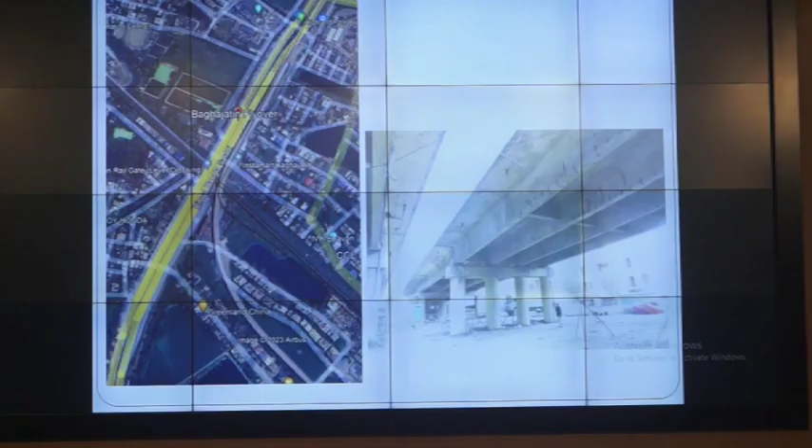See here, in many of the flyovers in Calcutta, you can see strip seal expansion joints. Please note down strip, S-T-R-I-P, strip seal expansion joints, wherein you don't get that railway bogie movement at all. It moves very perfectly, and no lifting up of vehicles happens there. In this bridge also such a good thing has been introduced.

This is an ROB, an overbridge over the railway lines. There are eastern and western flanks, about half a kilometer each approximately.

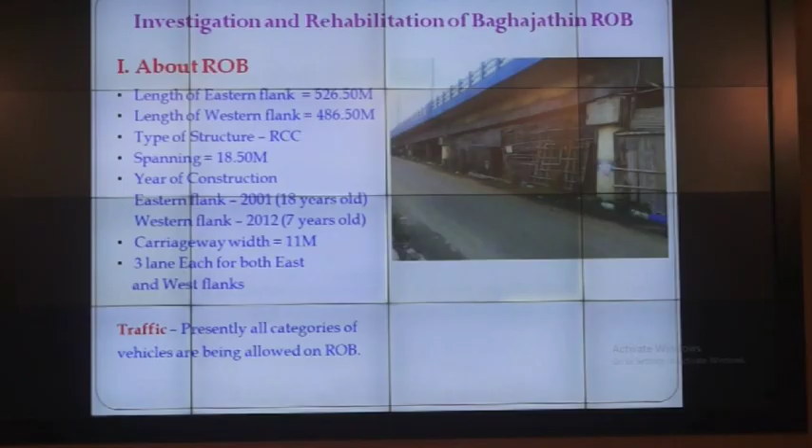Type of superstructure is RCC. Spans are quite small, about 18.5 meters. Year of construction: the eastern flank is about 20 years old on one side, and the other side is similar, a parallel one. It is not 2-lane, I think it is 3-lane. Each is 3-lane.

Built about 10 years back, one is 20 years, say about 10 years back. Please note, keep this in mind. Carriageway width is about 11 meters, usual carriageway, 3-lane each for both west and eastern flanks. Presently, all categories of vehicles are being allowed on this, and it's a heavily trafficked flyover because of frequent train crossings there, and a lot of aggregates pass into the city from the outskirts here.

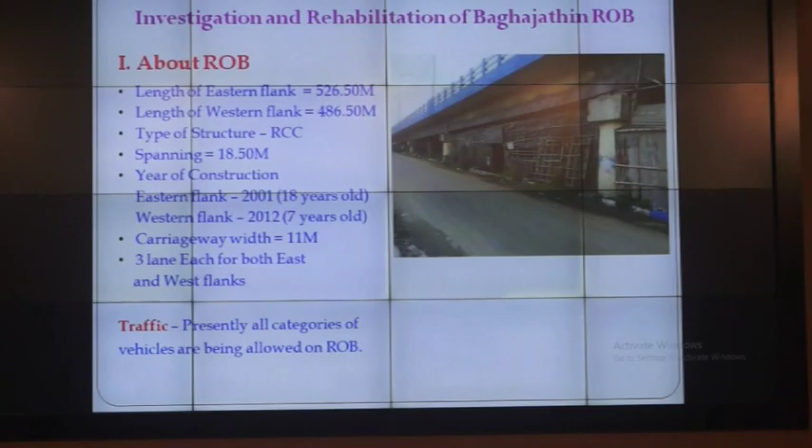What we have observed while carrying out the investigation, when we start with the investigation, what we observed was poor internal integrity. What is this poor internal integrity? You get this internal integrity when you test the structural member using an ultrasonic pulse velocity testing machine. Then only poor internal integrity will come.

What is internal integrity? Whether it is dense concrete or loose concrete, how loose it is, how many honeycombs are there. That comes into the internal integrity, and you have a code for that, to classify, you have 516. You can classify whether it is poor, better, excellent or whatever. It should be approximately more than about 3.5 km per second.

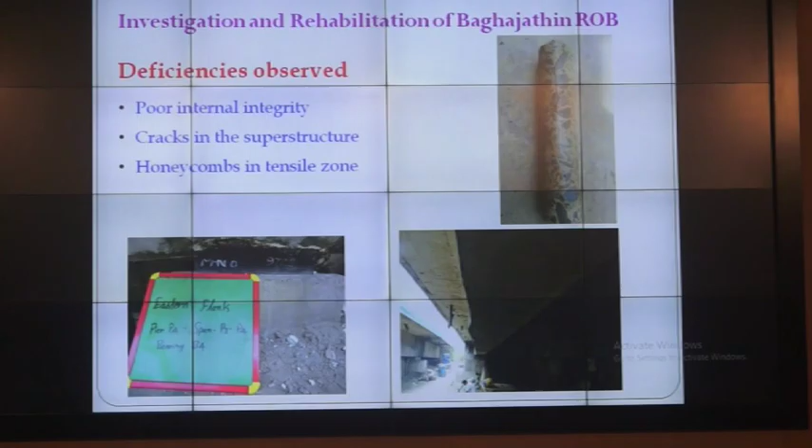The velocity should pass through the probes. Yesterday we showed you 2 probes, steel probes, passing, the ultrasonics passing from one to the other. So that's where you get this internal integrity.

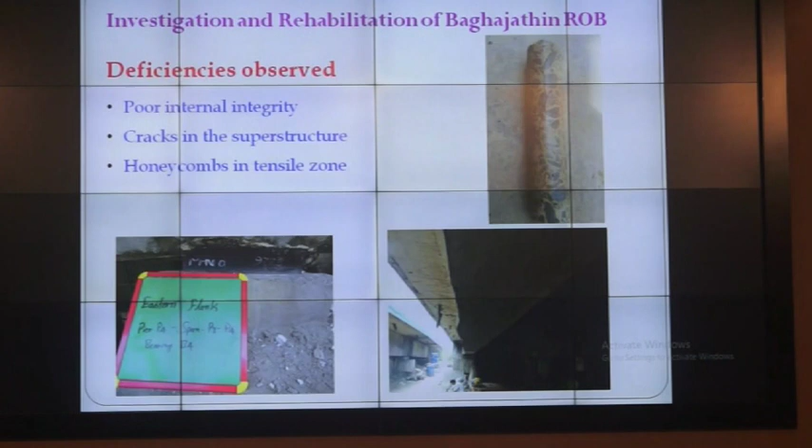Cracks in the superstructure were also observed. Honeycombs in the tensile zone, it is a dangerous thing. Honeycombs in the tensile zone, please note, the concrete has not gone into the tensile zone properly at all.

Then how do you expect... see, in order to complete a bending moment, you need to balance the tension at the bottom with compression at the top. That's the way your beam functions. A bending moment of whatever, say 500 ton-meter, when it bends, tension is created, and the same tension gets transferred to the top in the compression zone, and your bending moment gets completed in that sense. So to complete that, your tension should get transferred to the compression via the concrete.

Whereas your concrete itself has got honeycombs, lower values, or no integrity there, how will it transfer much of that onto the top compression? Thereby, structural failure, such structures will be on the way to structural failure.

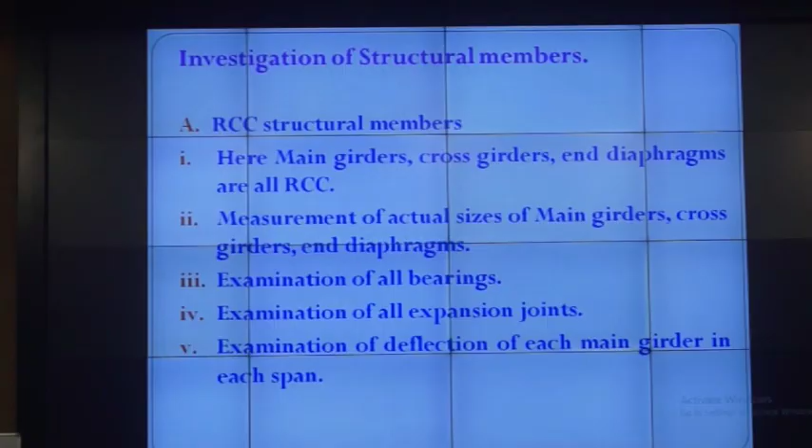Then the details about the structural members: the main girders, cross girders, end diaphragms are all RCC. Entire structural superstructure is RCC. What we have done was take all the details like sizes, and examination of bearings was done, checked the bearings, expansion joints were examined, examination of deflection in each main girder was taken, how much it is already deflected.

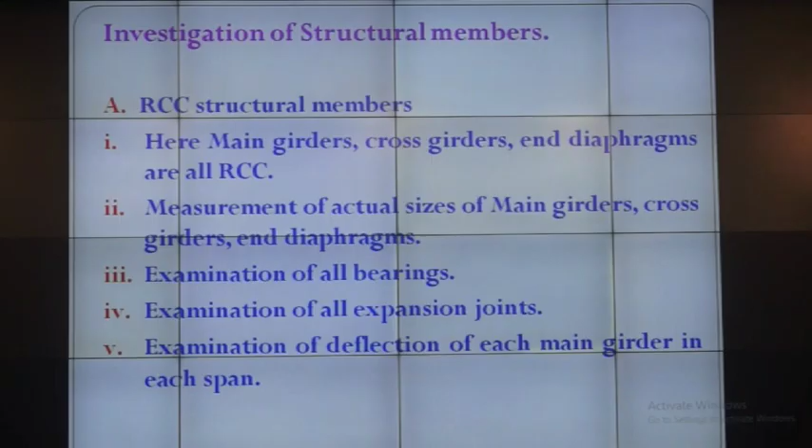The vehicles are passing, it is a live ROB. We have taken how much it is deflecting. Then the structural members, superstructure and substructure, are investigated.

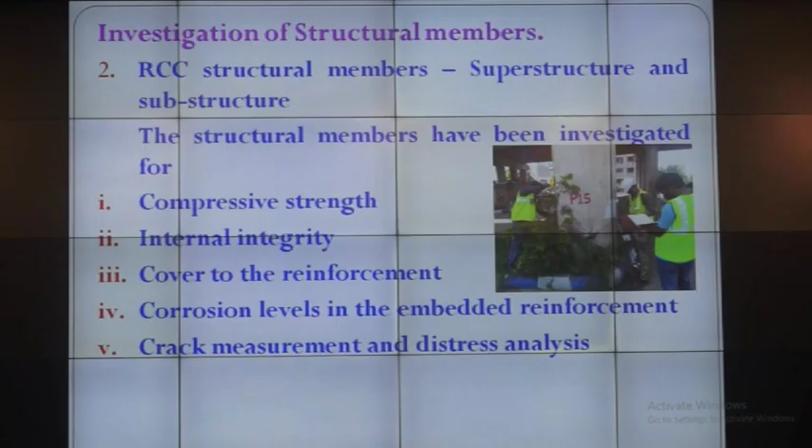What are the parameters they have been investigated for? What we have done is compressive strength. We have taken out the compressive strength by removing cores from the superstructure. Internal integrity is the same, ultrasonic pulse velocities have been tested at regular intervals. And cover to the reinforcement.

Yesterday I told you it is a profometer. We have kept the profometer, taken what is the cover, because that plays an important role in the durability of the structure. So the cover to the reinforcement has been taken. Corrosion levels in the embedded reinforcement, very important.

Yesterday what we told you, absolutely this is coming almost similar. Corrosion levels by the same electrochemical half cell potentiometer. Please remember, the electrochemical half cell potentiometer gives you the electrical potentials in negative millivolts, which has been taken here. That is a very simple one. You connect one wire somewhere there, the other wire or probe you keep on top, and you get it from that voltage.

There is no need for you to open everywhere, no need at all. Somewhere you open one reinforcement to complete the circuit, that's all. Afterwards your equipment will show you the reading in negative millivolts. If it is exceeding 300, be cautious. If it is 250, no problem, because at least 200 to 250 corrosion will be there, since when you put reinforcement on the ground, at least some reinforcement will get corroded or rusted out.

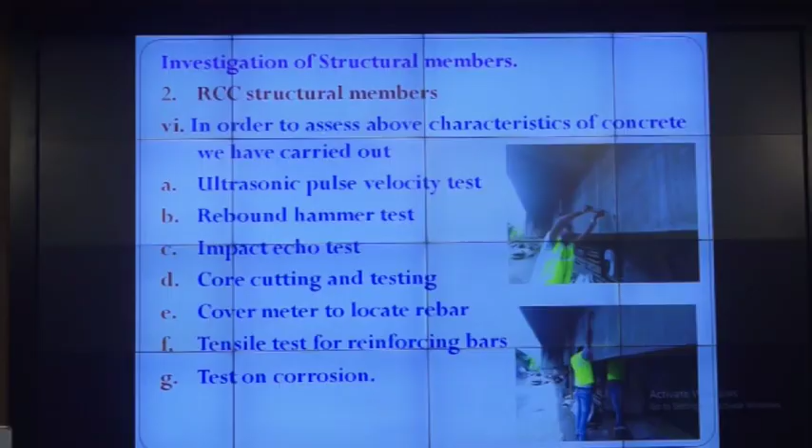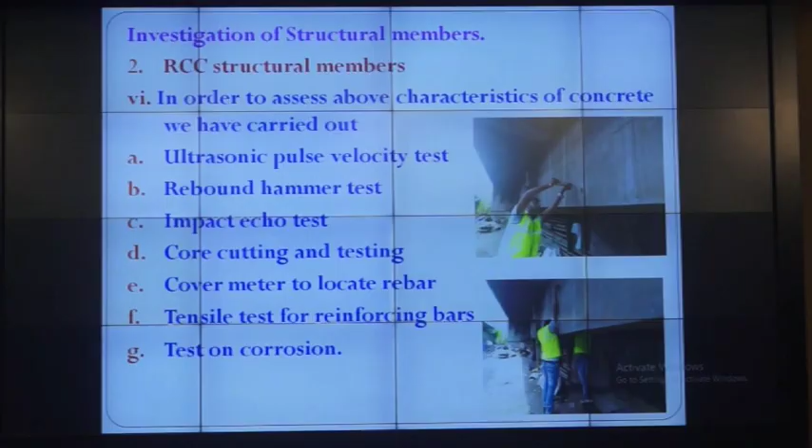As I said, in order to get those characteristics, I have already told you - ultrasonic testing, rebound hammer, impact echo, core cutting testing, cover meter, tensile test for reinforcing bars, and tests on corrosion. Whatever I have mentioned has been completed here. In fact, some bars were also removed from the structural member, about a meter in length, and sent for testing to check the tensile strength.

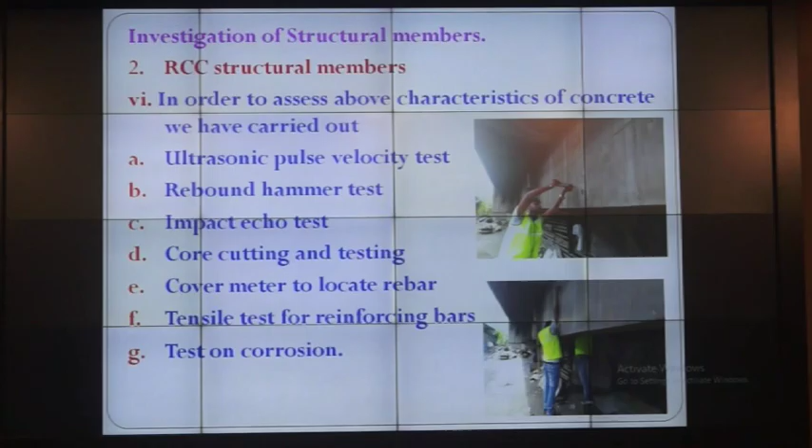Here, condition assessment or health condition assessment has been done for various elements, especially the girders, cross girders, diaphragms and bearings. We checked all the bearings.

One more thing we did was measurement of dynamic parameters through accelerometer, fiber Bragg grating and sensors. This is an additional thing normally not done - 95% of the time we don't do it, but in special cases like this, dynamic parameters like accelerometers check the velocity and dynamic characteristics of the slab. The resonance characteristics will become known. If the resonance of vehicles passing and the natural frequency of the slab coincide, then it is expected that there will be formation of a hole on the deck slab. Fatigue plus this will happen, and that is the latest thing happening.

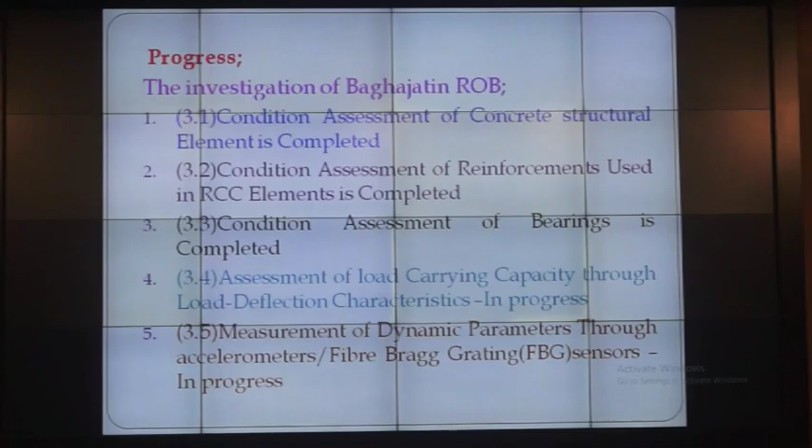Then we did a load test on the ROB with LVDTs and strain gauges, for all 3 spans. Temperature measurements for 3 spans were completed. Temperature - yesterday we showed you whether there is some problem with heat generation due to some collapse. Something is happening, so as a precautionary measure we took the measurement.

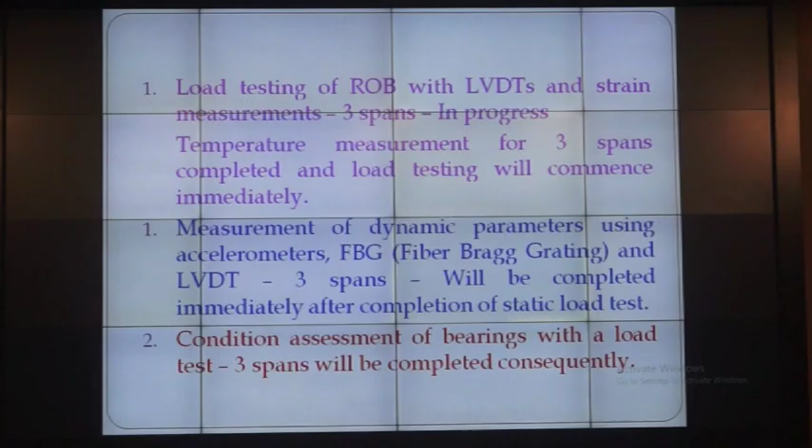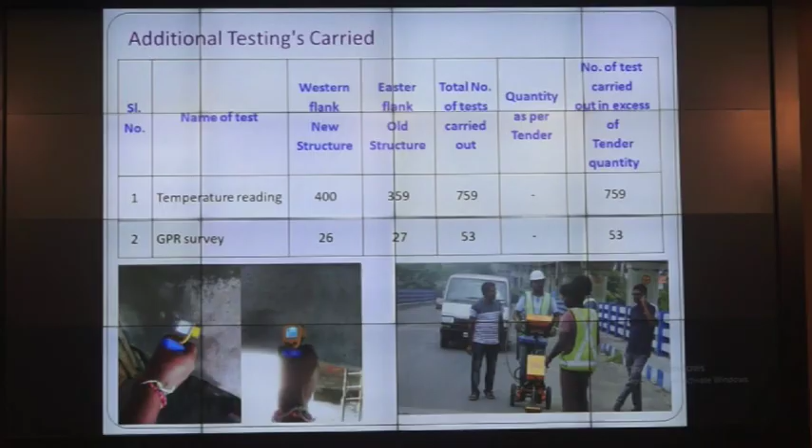These were the instruments used there. You can see additional testing carried out for temperature - these are all beyond our contractual obligations. On the right side you see the GPR in action - ground penetrating radar. That will show you any delaminations in the slab. There is some delamination - for your 200mm or 220mm slab thickness, if it has horizontal or vertical delaminations somewhere, that equipment, shown in the right side photograph, will show you all that. The left one is the temperature measurement.

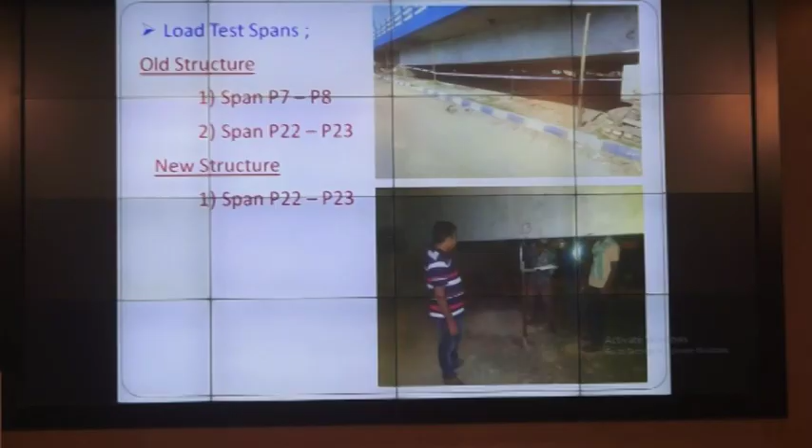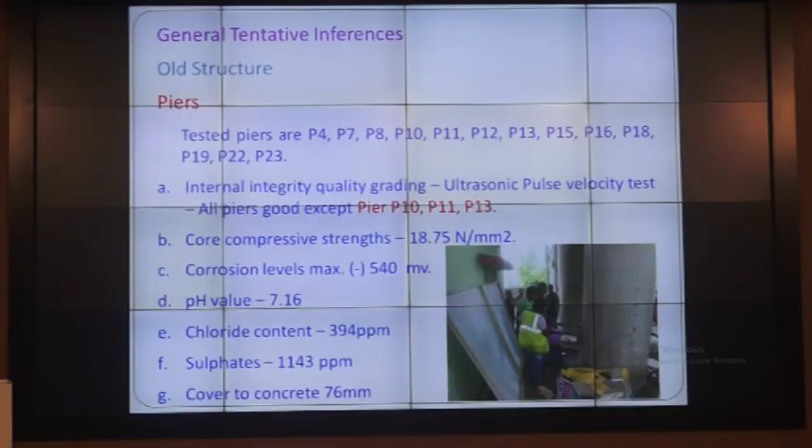These are the load test spans we have selected for the load test. That old structure was built about 18 to 20 years back. Tested piers are these piers, P4 to P23. Integrity quality grading via ultrasonic pulse velocity test is good for all piers except 10, 11, and 13.

Core compressive strength obtained - please note, these are the results we obtained from the site after sampling, either through ultrasonic testing or cores. Core compressive strength is only 18.75 Newton per square mm, that is 18.75 MPa.

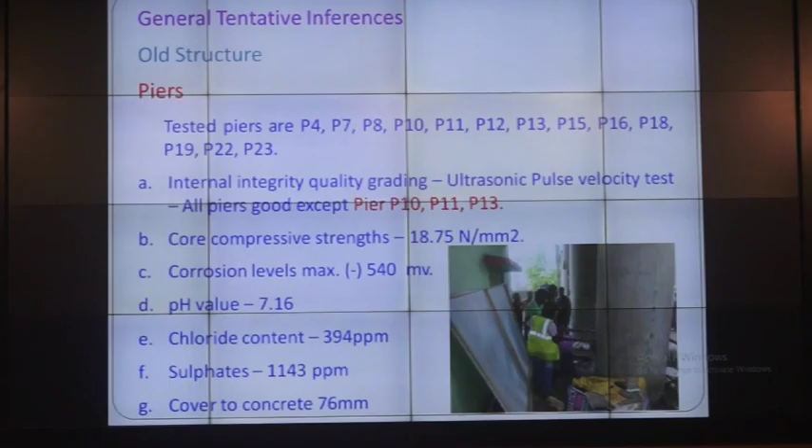Corrosion levels in negative millivolts - I was telling you about 350, whereas here it's 540 millivolts. Please note one more extremely important point - the pH value of about 10 to 20 samples taken from the structure, the lowest possible was 7.16 pH for the concrete. This is unacceptable - I have not seen such a low pH. Yesterday, that's the reason I was telling you about pH values. Absolutely, a 20-year-old structure has come down to such a low 7.16. You can't expect the life of the structure with such low pH values.

pH of concrete is straight away related to its durability, anywhere in the world. Higher pH means more life; lower pH means forget that life, it will come down. Or by some means, if you want to increase it, you can get back its life. But it is losing it, becoming older and older.

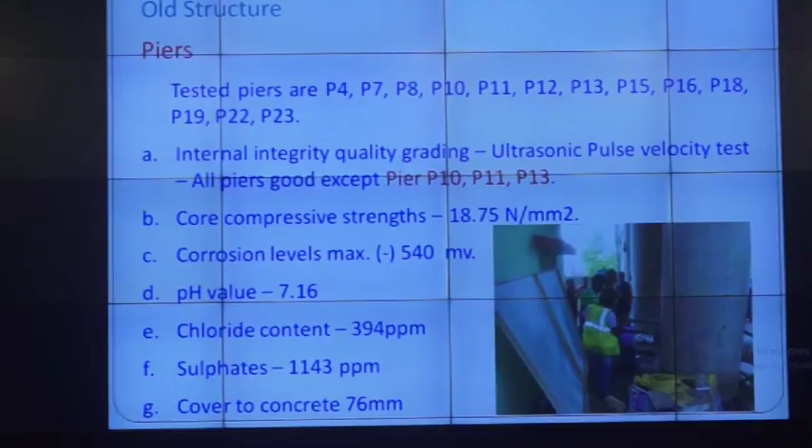The chloride content is about 394 ppm, by and large okay, because chloride content is related to the quantum of cement put into the concrete. Sulfates also similar, quite a low sulfate level, because our code allows bigger high quantities. Cover to the concrete is very good at 76 mm. But more cover is also not good because you get cracks at the bottom very easily. If it's about 40-50mm, it's okay and manageable.

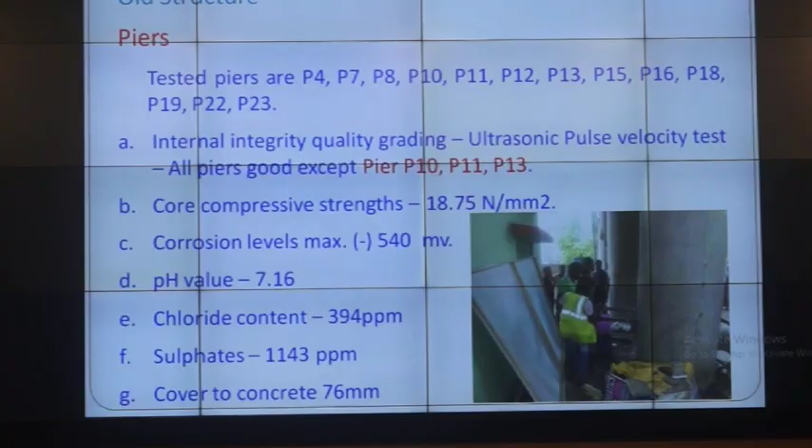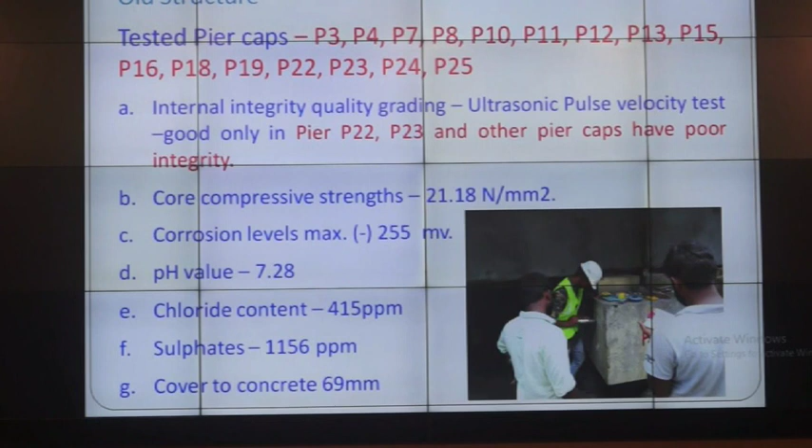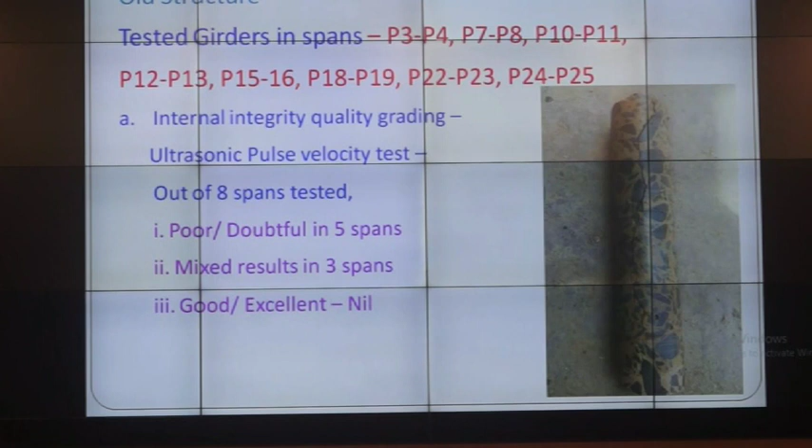Please note down, when you make it, don't say carbonation, it has happened, carbonation can happen from 11 to 7, anything can happen. But if you say 7.13, then people will understand, yes, this has got a problem with that.

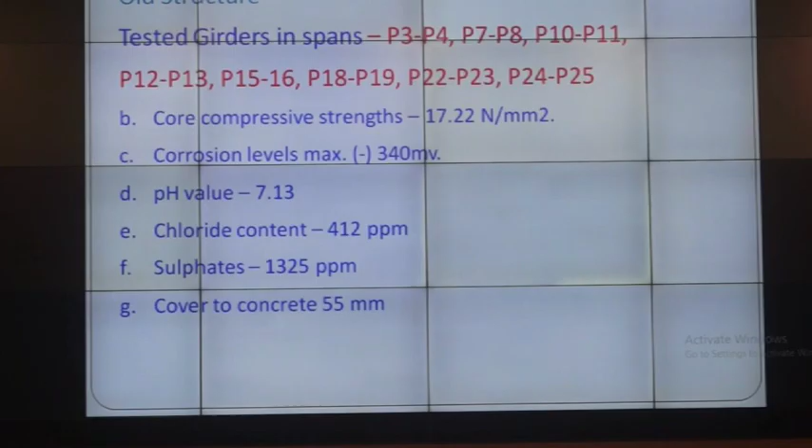Then chloride content is about 412, so margin, sulfates okay, cover is by and large okay. Then old structure also, internal integrity, poor and doubtful in all the spans. Poor and doubtful in all the spans. There is no, unlike a good, better or at least marginal, nothing like that.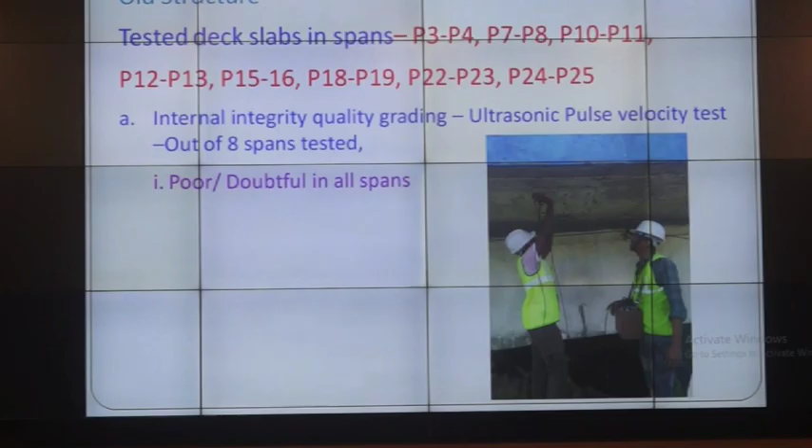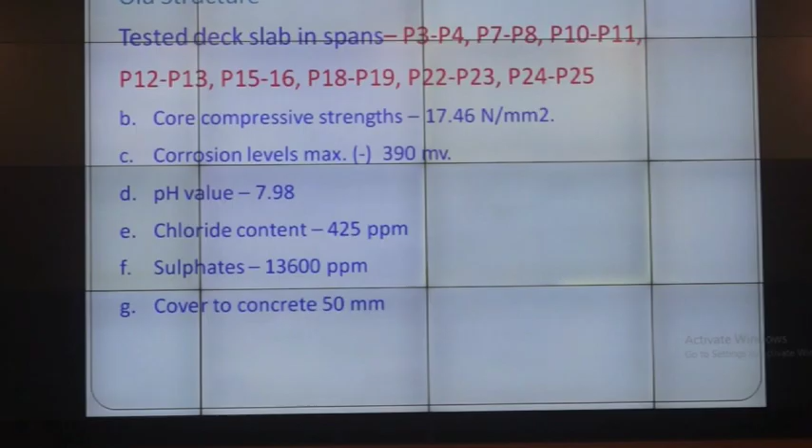Then old structure, tested deck slabs, again girder finished, we went to the deck slab. Again deck slab, core compressive strength about 17.5, corrosion levels 390, it is quite higher. pH 7.98, it is below 8 only, not acceptable. Chlorides, sulfates, cover, they are all okay in this range only.

That's exactly the reason yesterday I told you, when you want to rehabilitate a structure, please take out a core, you don't do anything first. Whether it is fit enough to do the rehabilitation, investigation also you can make out. You just take out a core, cut it, set it to pH value, if it is quite less, no need to do anything further. No need to put your stethoscope there. You can simply say put a new estimate, replace that.

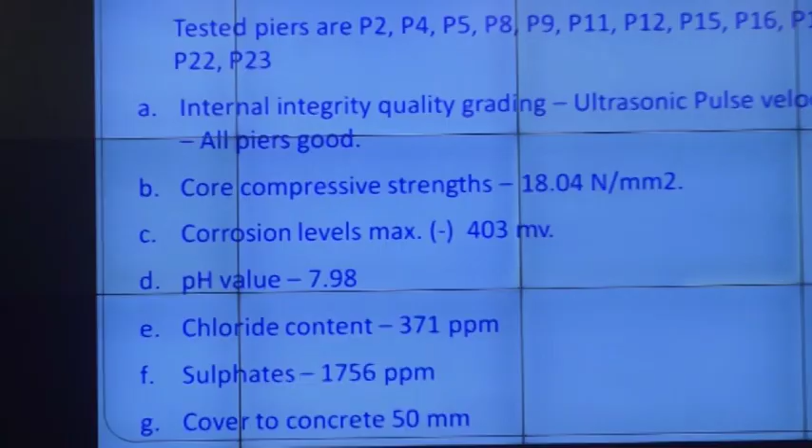Only superstructure. Then the new structure, piers, again piers, the circular piers what you have seen there in the first photograph. Piers, again almost similar results are there, 18, corrosion levels are very high, 400. pH is again low, only 7.98.

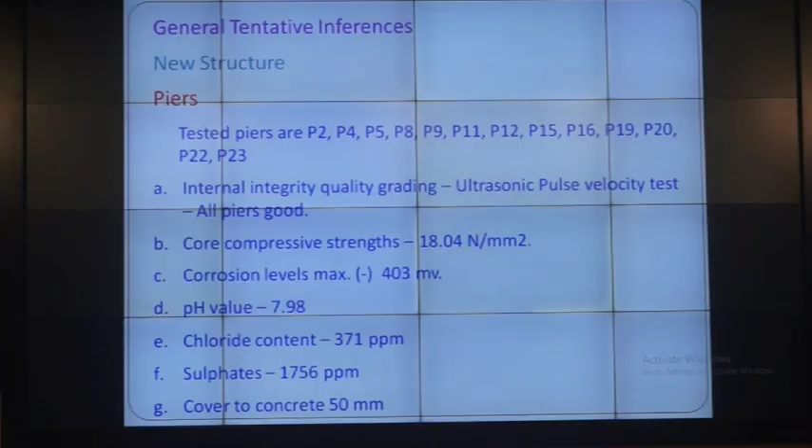How do you make out the pH? 7.9, 8.9, 10.9, how do you make out? It is not a big thing. You get a pH meter in the market. You crush the sample, put in water, take the sensor and dip it inside. Immediately you will get the pH value.

You can do it in your, suppose you have a regional laboratory in your Raipur, you can do it there only, buy an equipment. I don't think that should cost beyond 2000... beyond a lakh rupees, a good one. Many types of equipments are available in the country. You can make it out.

There are strips for emergency. You can take the strip pH value. Strips are available, paper strips. You dip it, emergency, that is, go to site and just dip it and check it out. Phenolphthalein solution is always there, but that gives you only carbonation.

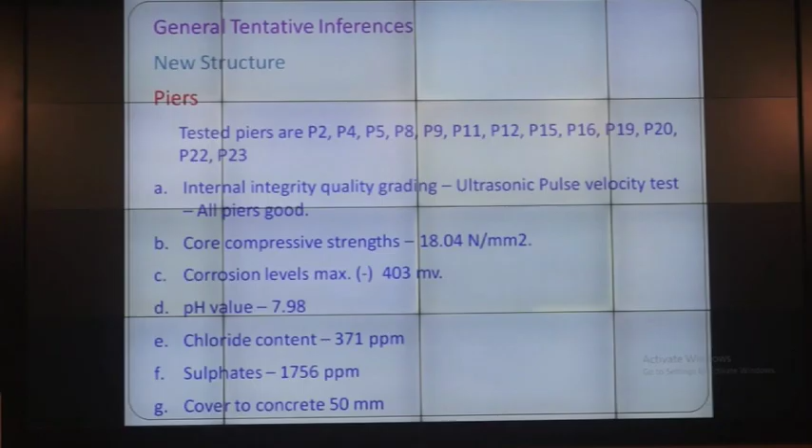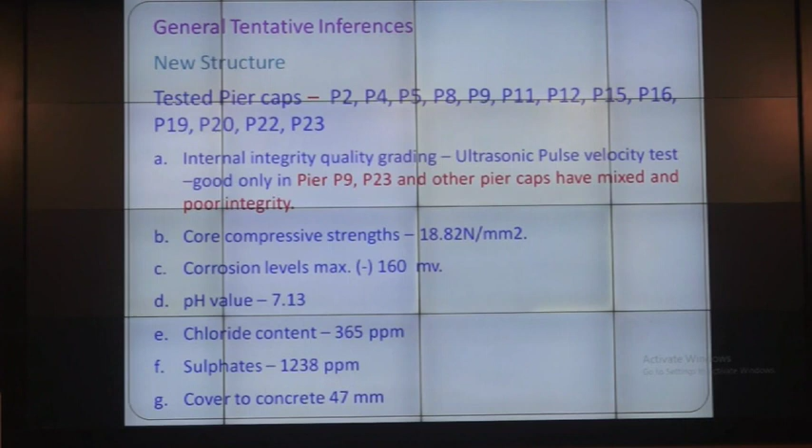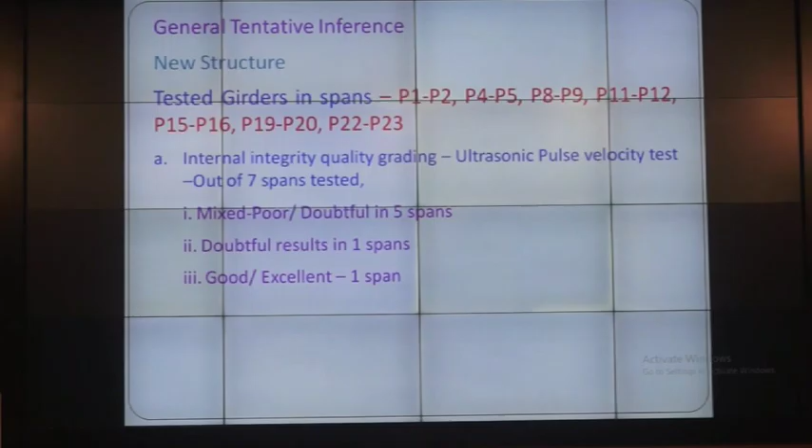Please see this. Quite disturbing results. Then the caps, pier cap, again almost similar, almost pier is same, almost pier cap is same. Then you go to the girders, again similar, mixed results 5, doubtful results 1, good and excellent results 1. Then again the strength characteristics almost same.

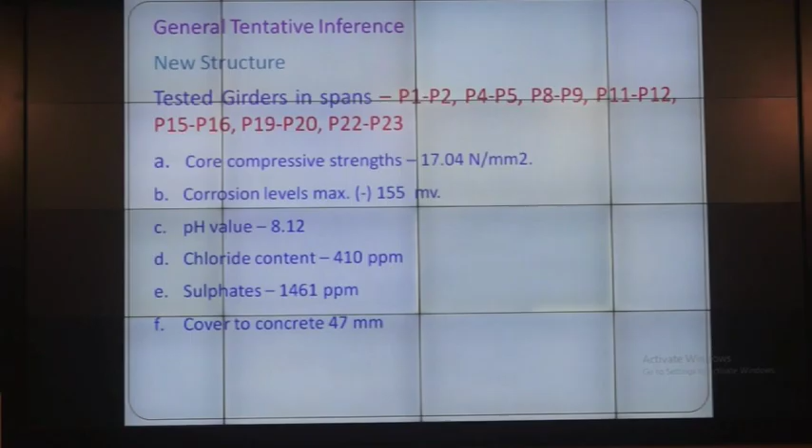In fact we started from the old structure, that is substructure, pier cap, deck, below that depth girders. Similarly we are coming like that only in the new structure also. In the deck slab, these are again the doubtful mixed results. Excellent, good, very good is not seen at all there.

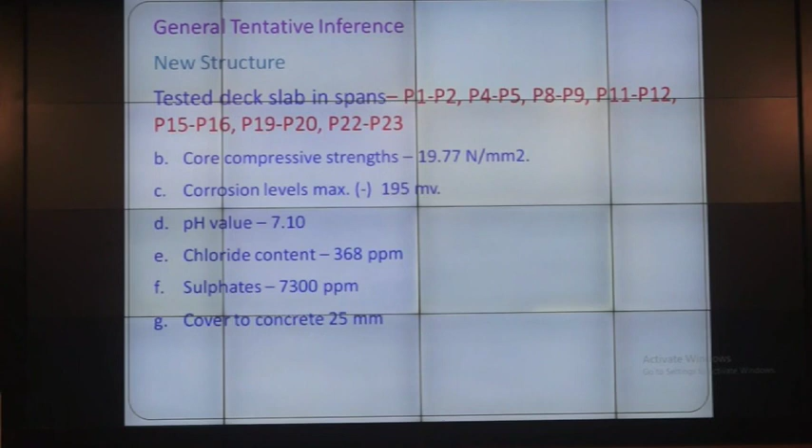Deck slab again same, 7. Corrosion levels are bit under control, I think 195 negative millivolts is there. There is no much of the corrosion problem here. pH is again down. Cover is not there, only 25 mm.

And with these type of results, you can ask me, yes, your investigation is correct, what you did with that? We completed the results. We said that your deck slab, girders, pier cap, piers are unfit to be under service. Gaadi ja raha hai, vehicles are going, everything is okay. It has completed the load test also. The load test is completed satisfactorily, but the chemical composition that is required is not there in the structure. For durability consideration, it is unfit.

And since the pH levels are so low and the corrosion levels are so high, compressive strengths are hardly anything. When we checked, of course, it is taking the load. Even with 10 to 12 Newton per square mm it is taking the load, because we cross-verified the designs also. There is no problem. But durability wise, we just do not know when it will crumble. So additional strengthening measures were given at the mid spans and some cross beams, cross girders, only for the safety sake.

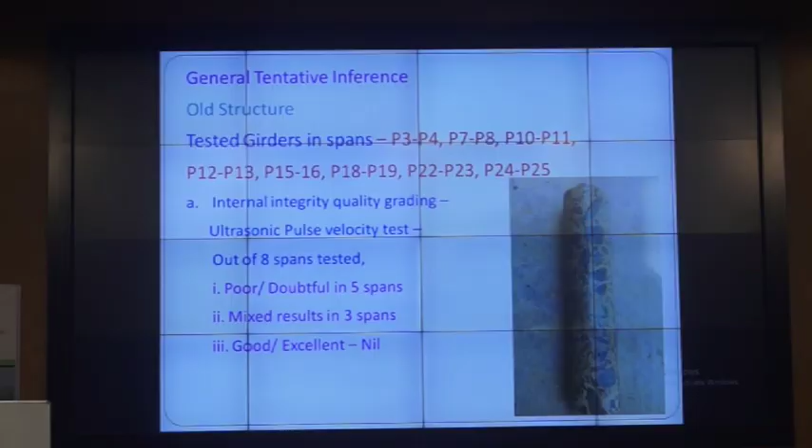No, that was an investigation. That's not for compressive strength. Compressive strength was taken separately. Because what we saw was a crack, we wanted to check the depth of the crack. And that we have shown you there. Yeah, this one we were talking about, I think. See here, the length of the crack is there, totally. Oh, this LED, that line, you are not able to see it there, I think.

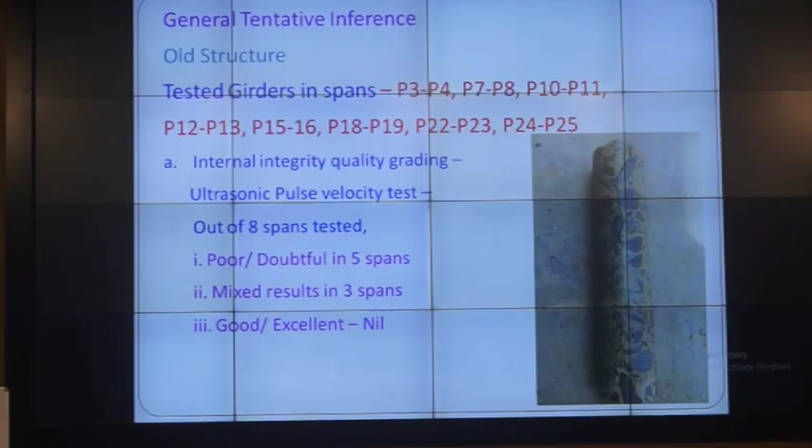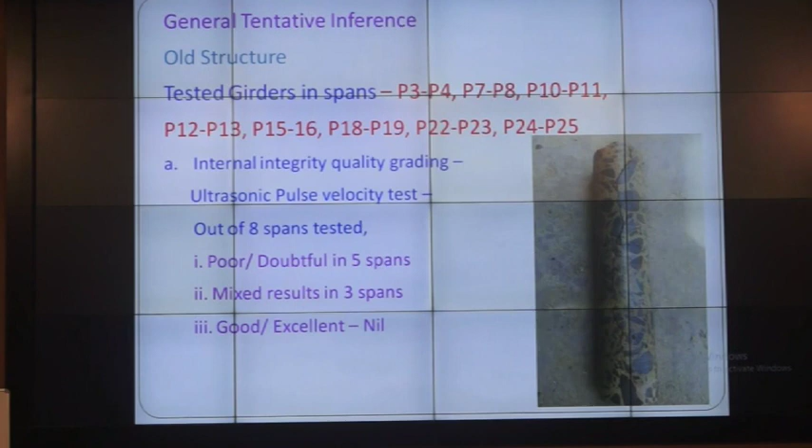Here, along this, a full-length crack is there. Full length, and we wanted to find out what is the length of the crack, what is the depth it has gone, whether it is full or half, so that at least we can come to know about it. That's the reason we went for it.

Sometime about 1.5 years back, rehabilitation of Marvoor Bridge across Gurupura River, Mangalore. It is just below Mangalore Airport. The airport is on top, this river is below, adjacent to Mangalore city. And Mangalore Airport is serving that entire side of Kerala, Karnataka, and from the airport they pass through this bridge, go to Mangalore, go to Kerala, go everywhere.

And something went wrong with this bridge. They used to go all round, I think about 30 kilometers, make one round and come back. And things went wrong. It was not expected. Details of the bridge: the bridge has 9 spans of 20 meters each. It is not very much.

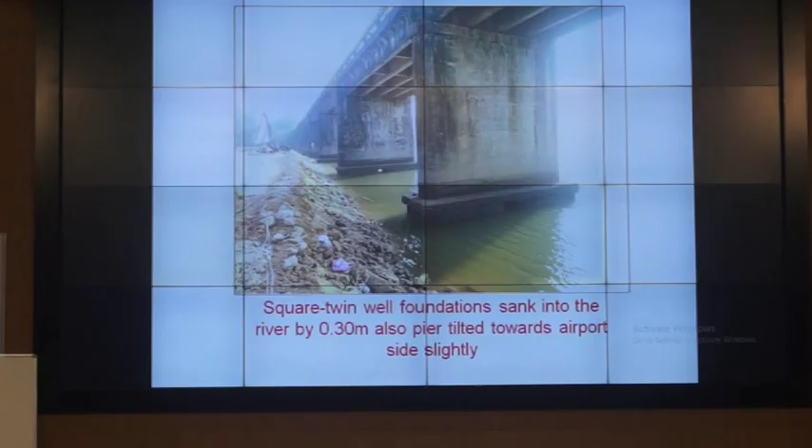It is an RCC girder slab bridge with plate piers, RCC well caps, RCC wells, and it was built around, I think, 1960 or 70. It was not a modern structure like what you build with bigger well caps, bigger pile caps. You can make out a small, thinner 300 mm thick slab on the well cap. See, this is the well cap thickness, and the wells are square here. Square wells, 2 numbers, I think built by somebody from Andhra Pradesh.

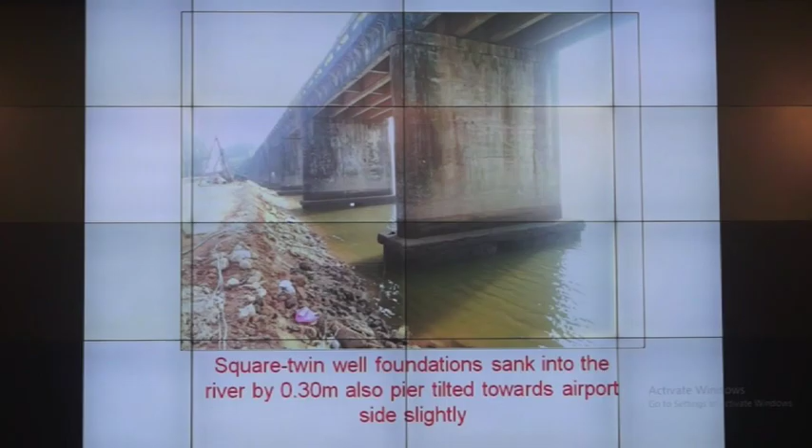And the problem was not much there because it is a sandy strata, they could easily sink these wells. We checked up, it's about 25 feet, about 8 to 9 meters in depth. See, this is what happened: about 300 or 400 mm, one pier went inside the river. It was a very heavy monsoon in Karnataka. So scour has taken place adjacent to that. That has pushed down the pier. By God's grace, it's only this much, and it didn't go more than this.

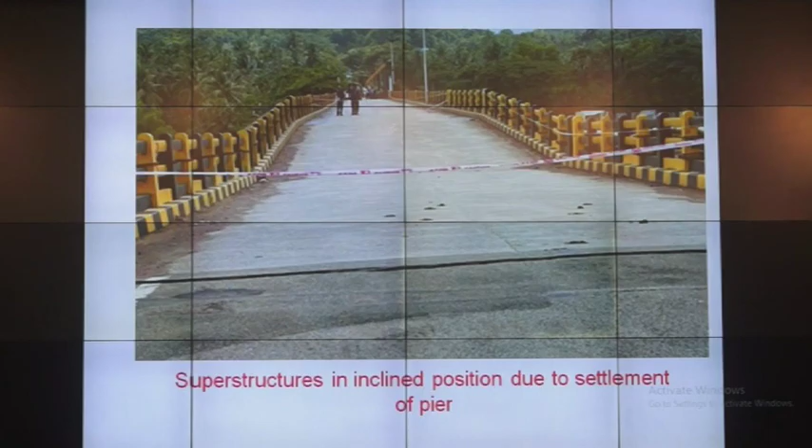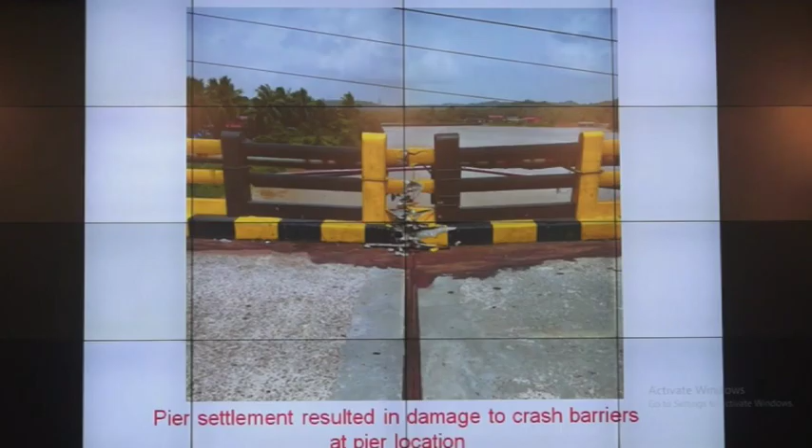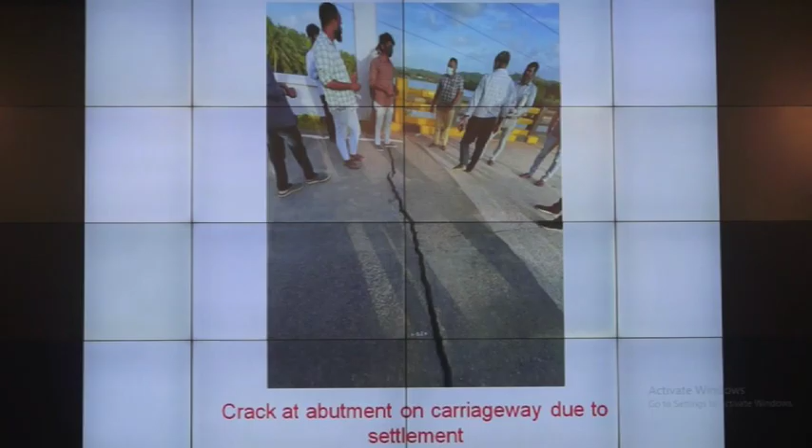See, the crash barriers broke at the expansion joint place. Again cracked at the abutment because it is lifted up. The other end is down, so this end is raised. That's the reason you get a crack here at the abutment. Then what to do?

Then immediately they called me. What to do with this? I had work. I said I cannot come, I got some other work. So the chief engineer and all others asked me, sir, please come immediately, we are also coming there, we'll try to sort it out. All traffic was closed. In fact, people were also not crossing because they are afraid, because it is going down like this. So what to do? Then I went and checked there.

To further arrest it, I suggested, you do one thing, you get some boulders. I know well, if you are doing boulders, it is very difficult afterwards. You cannot do any rehabilitation of your wells and caps below. That will be difficult. So I said, okay, presently let us sort it out. So we put the boulders so that further settlement of the wells or well cap doesn't occur because of the friction created there.

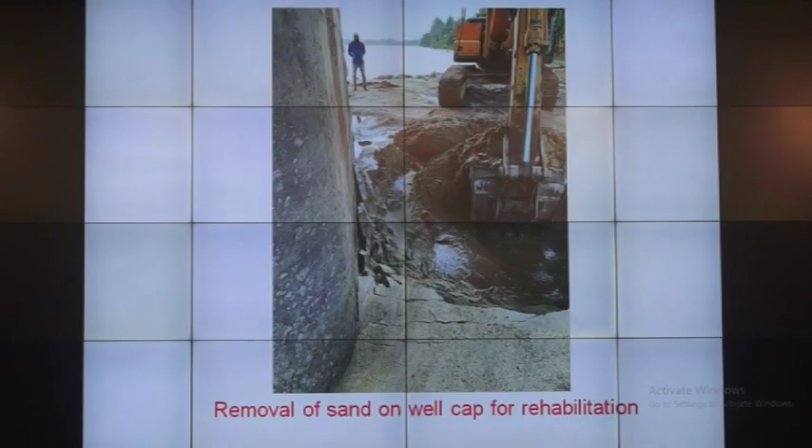In fact, I even suggested some coconut trees, if you can cut and put them up there, that will impart a lot of friction, because that was taught to me by seniors about 40 years back when I was working in the public works department. Even the ministry people told us to cut some leaves and put them on the side, so that it will give a lot of friction and it doesn't settle down quickly. So we put some boulders there, arrested it, and whatever cap you see, we rebuilt that cap.

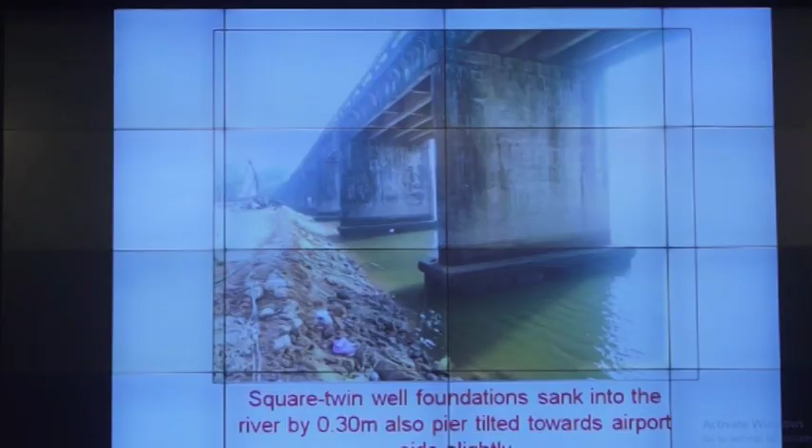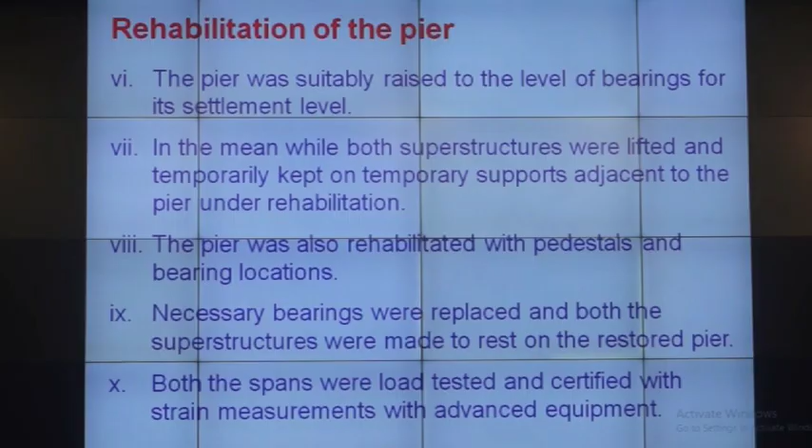Yeah, this cap, we rebuilt that cap with additional reinforcement. I don't have photographs of this reinforcement and concrete. Then the pier also was encased, because while going down, it has not gone down vertically. It has not gone 100% like this. It went down and it has slightly tilted on one side, about 100 mm and 200 mm, because of which the superstructure cannot sit properly there.

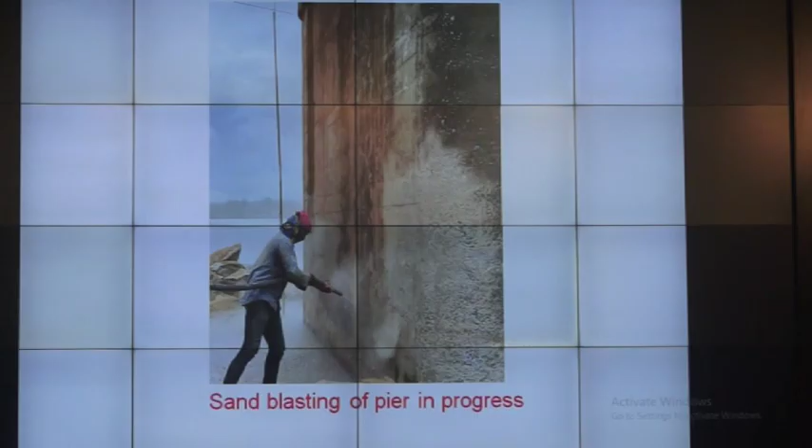Then while doing that, first what we did was we sandblasted the complete surface. After sandblasting, reinforcement anchors were put. I should have got all the photographs, that would have been very useful for you. Then we put the vertical reinforcement, then the stirrups, then about 150 or 200 mm encasement we did with micro concrete, M70 grade, specially made micro concrete. One of the manufacturer's factories was nearby, he supplied us. We did that, cap was put.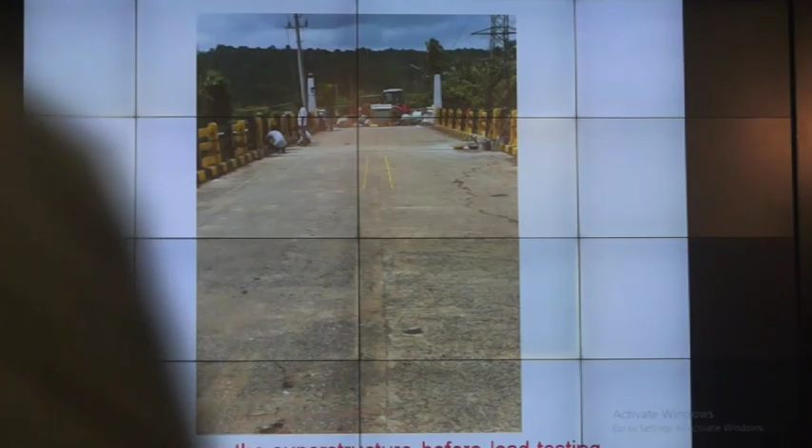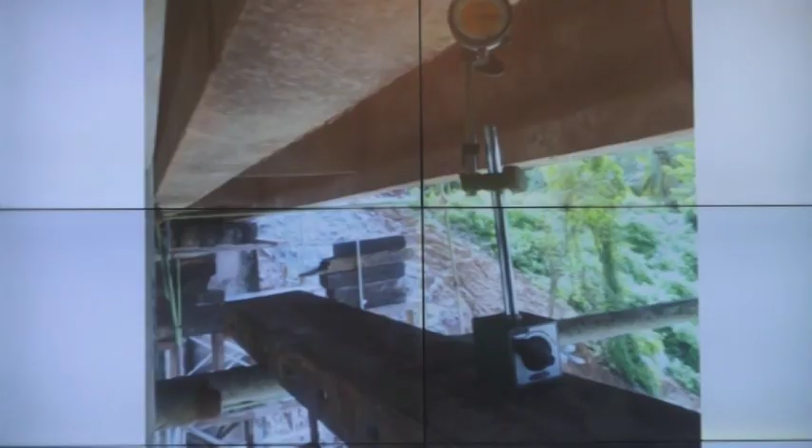Again, the entire pier was raised to the zero level, whatever level was there earlier. New pier cap was put, new pedestals were put, new bearings were put, and on 2-3 spans bearings were changed. When you have a look at it, you cannot make out how much it has settled. This all was completed in about 45 days. And see here, we did the load test with strain gauges you can see on the top. Strain gauges are there on top. Here.

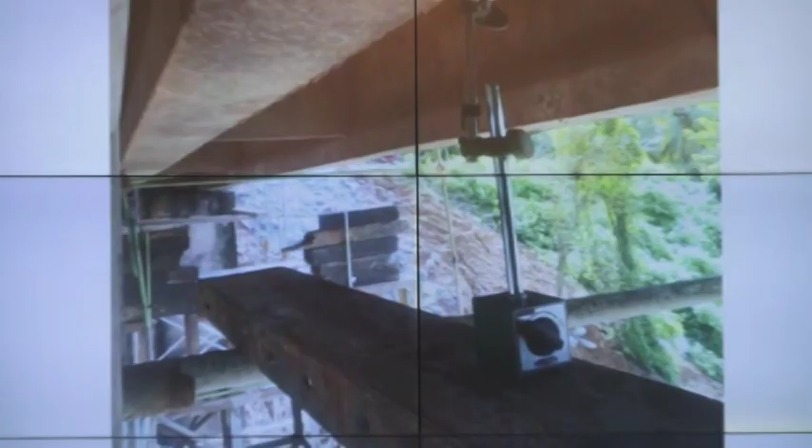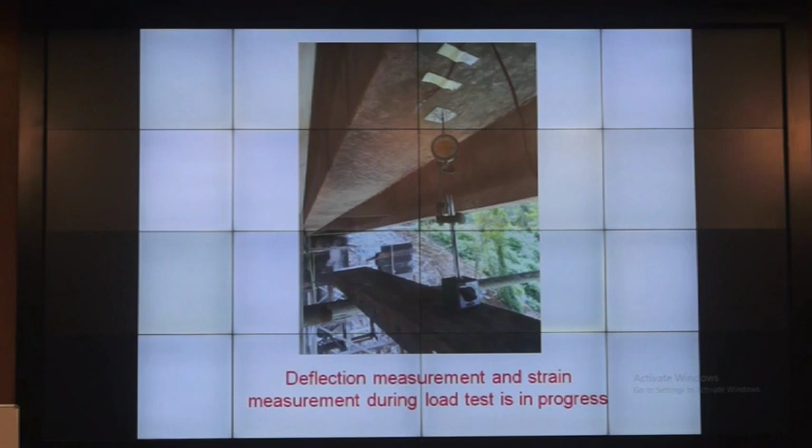And we also fixed here FBG, fiber Bragg grating. Fiber Bragg grating is a new thing wherein in one wire you can put some 100 strain gauges, and you can fix all at different locations. You can get the strains wherever you want in one machine. That is excellent equipment. The wire is so small you actually cannot see it. It is this much only. When you take a step and widen it with that glass, only then can you make out. It is so thin, and it gives full-fledged strain measurement, more accurate than your regular electrical strain gauges. So that is there.

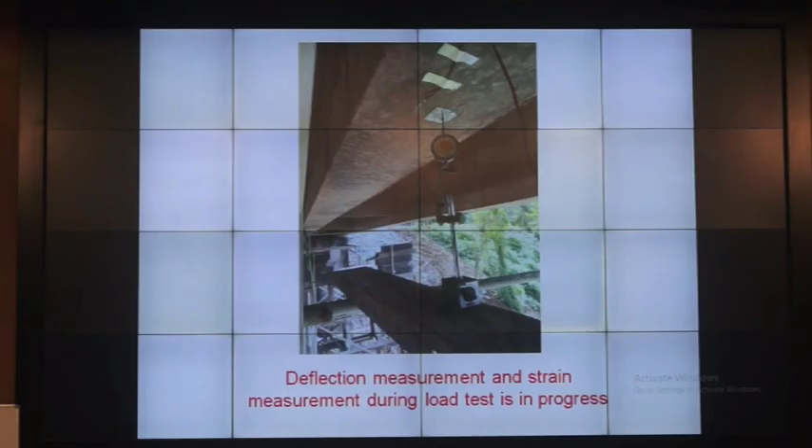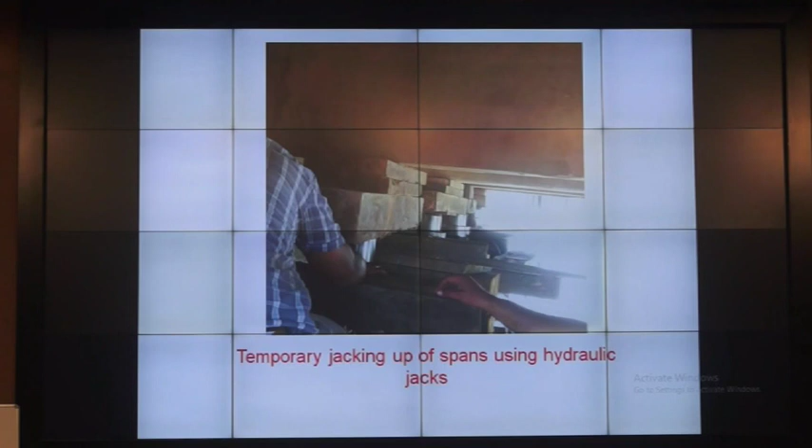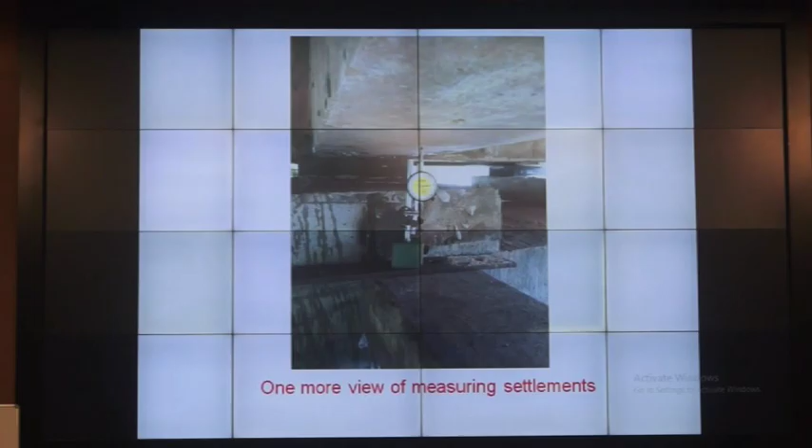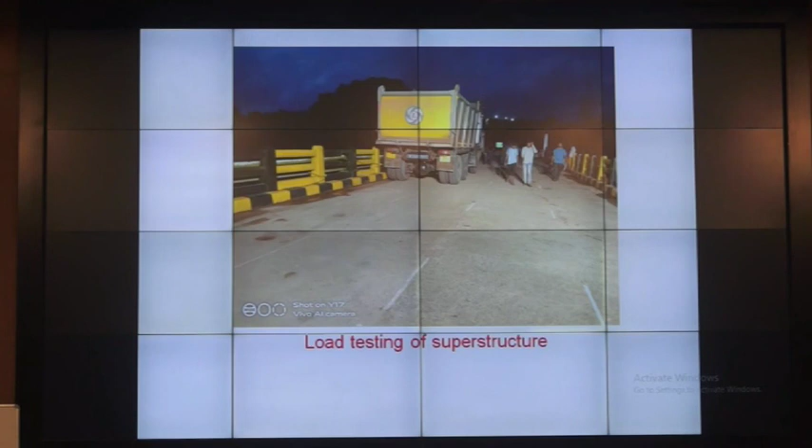And the girders were lifted up using hydraulic jacks. It was like this, bent down. Some temporary supports were put on both sides of the pier, lifted up and made level properly, and the pier was repaired. You can see here, repaired pier, repaired pedestal. This is a newly cast, encased pier, completed, ready for load testing. And this is load testing midway in progress. As per IRC SP 51, designs were checked. See here, fully loaded trucks, and the measurements were taken at the bottom.

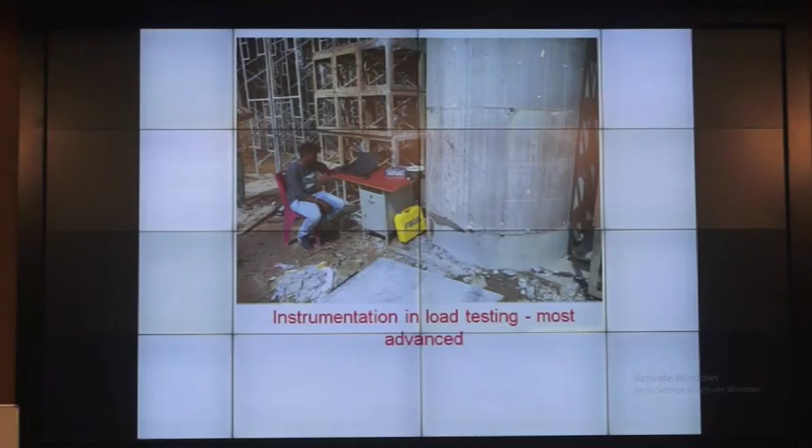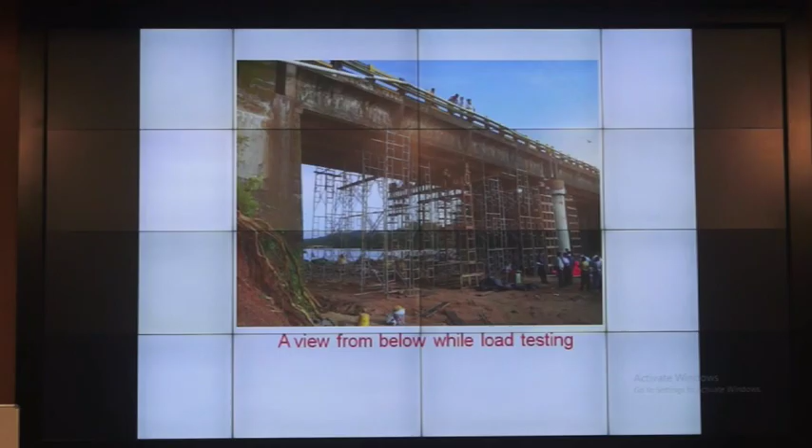I was telling you about FBGS, fiber Bragg grating strain gauges, very important. This is available in Germany and Belgium. Quite costly, but it can be used for our needs. And this is one of the photos where the span is completed and the pier is completed. This was completed in about 45 days, and if we had left it for a day or two, probably it would have collapsed, because one of the spans was just sitting here, maybe about 100 mm or 50 mm, at the edge. Any moment this breaks, it will go down. Somehow we gave support in the beginning stage itself. It took about 45 days to complete and open to traffic.

In fact, there was a suggestion from the Public Works Department, our executive engineer: sir, let's allow cars first, why trucks on the deck, afterwards something may go wrong. Then I said, no, SP 51 you have completed, the report is there, signed, let them go. In front of me, I said please allow big trucks. It worked well. The MLA was there to cut the tape, and he was happy. The public was very happy. As civil engineers, I am telling you, on such occasions, just look at the faces of the general public, how happily they go. You will feel elevated.